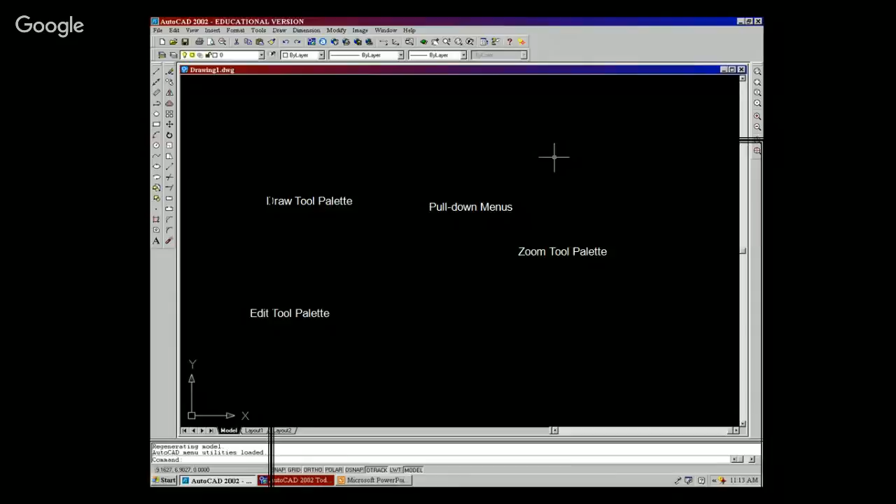Now let us see what these things are. This is the command area, at the bottom of the screen, where it is written 'command'. Here you will give the input. For example, if you want to draw a line, you will give a line command: type the first alphabet, L, and press enter. Something will happen on this black screen, which we will demonstrate when we show you. First, let me explain what things are available now.

This is the standard toolbar, in which you have the basic operations: file opening, closing, saving, printing, zooming in, zooming out, cut, copy, paste, undo, etc. Above this is file, edit, view - this is called the menu. These are the pull-down menus, just like in Word, where there is a file menu with various options in it.

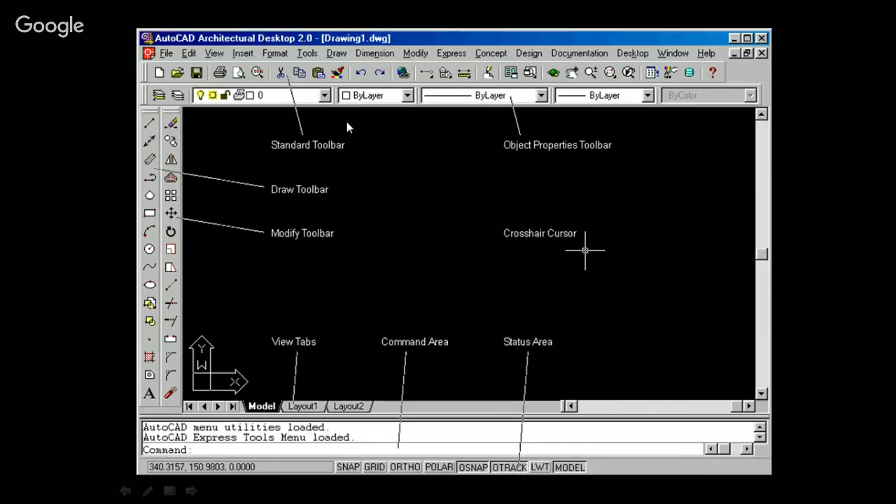From the menu you can also give commands like draw, modify, or you can give the command from your icon bars - these are the various icons, the shortcuts. When you get familiar with the software, you can directly use these icons. So these are the various options.

How to start AutoCAD? Double click on the AutoCAD icon which is on your screen or desktop. What you get in the AutoCAD environment is drop down menus, standard toolbars, specific toolbars, the graphic area, the view tabs, the command area, and the status area. The command entry can be done through commands, menus, and icons.

First, for making any drawing, you have to set the units, or do the formatting - in which units you will be working, whether it is millimeters, centimeters, or inches. So you will set the decimal units and the precision. For that you give a command known as format units.

Next we come to the limits. We will give limits to our drawing. Generally it is 12 by 9, and it starts from your lower left corner, that is 0,0, and upper right corner - for example, it is written here 200 by 220 centimeters.

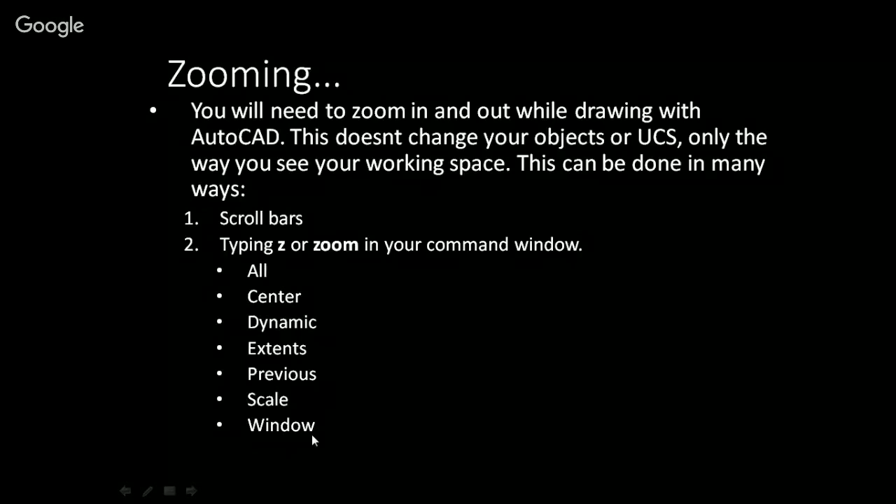Then there is zooming. These are the various options - all, center, dynamic, extents, previous, scale, and window - which are available under the zooming line.

And if you want to draw a line, how do we proceed? First of all, we have to give the line command or type L. Then we will give the value of X1, Y1, Z1 is written here, but if you are working in 2D, there is no need. Then for the other point, it is X2, Y2.

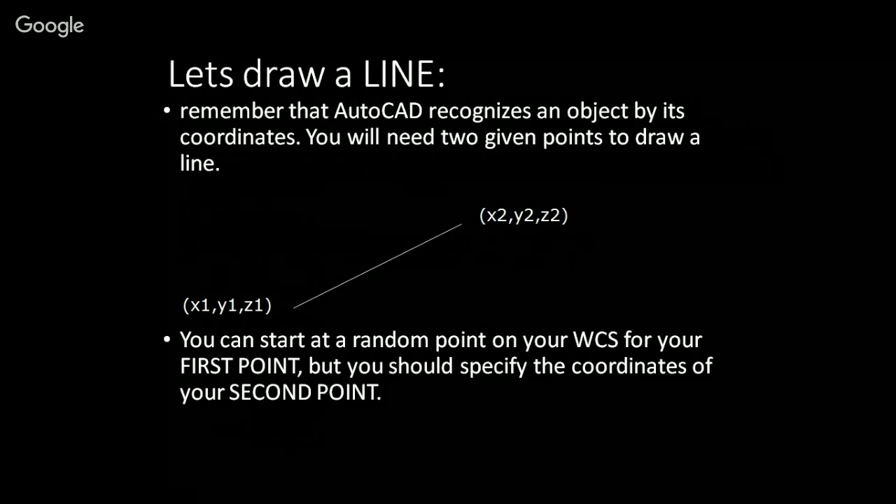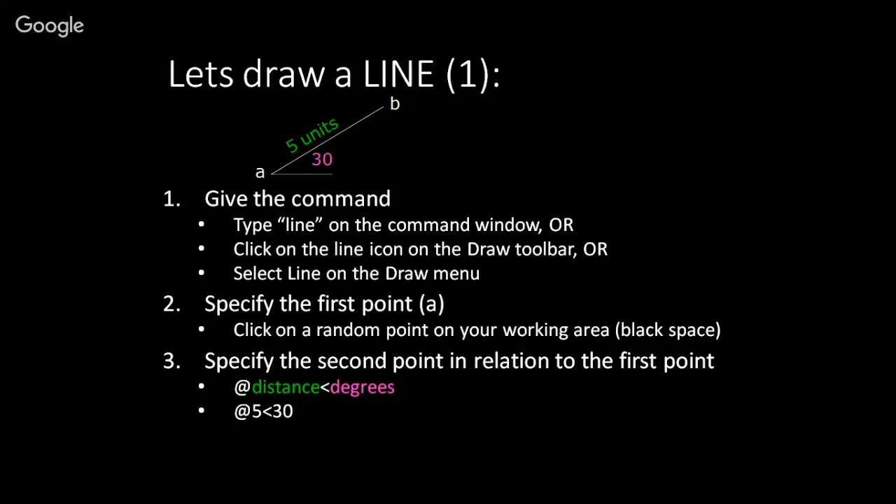So now let us start with our drawing. Let us say a line is to be drawn of 5 units at an angle of 30 degrees. So let us draw it by various methods: relative coordinates, absolute coordinates, in Cartesian mode as well as polar mode. And what are the ways? Now Mr. Hridaypal will demonstrate you how to do it.

Exercise. Yeah, exercise.

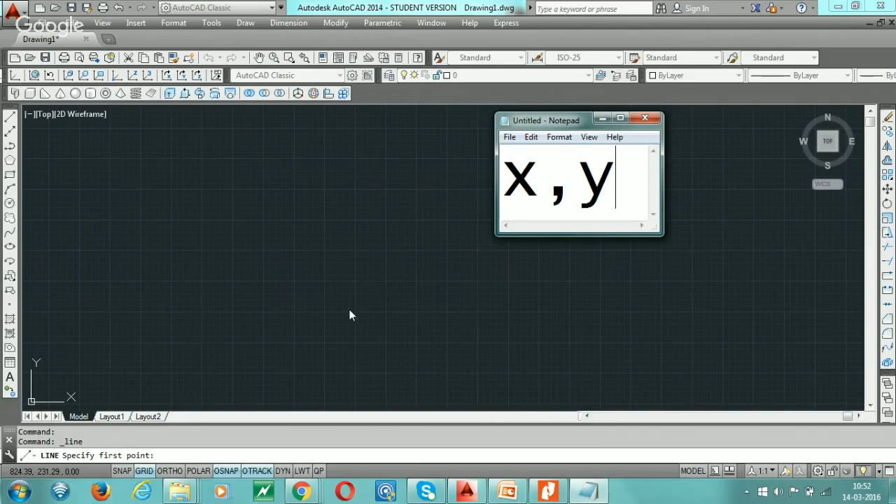Now go to the line command from the draw box. First, the syntax in this is the syntax of the line command. Syntax is the way to write, like first x comma y in 2D. We are using absolute coordinate system, so our first point is 0.

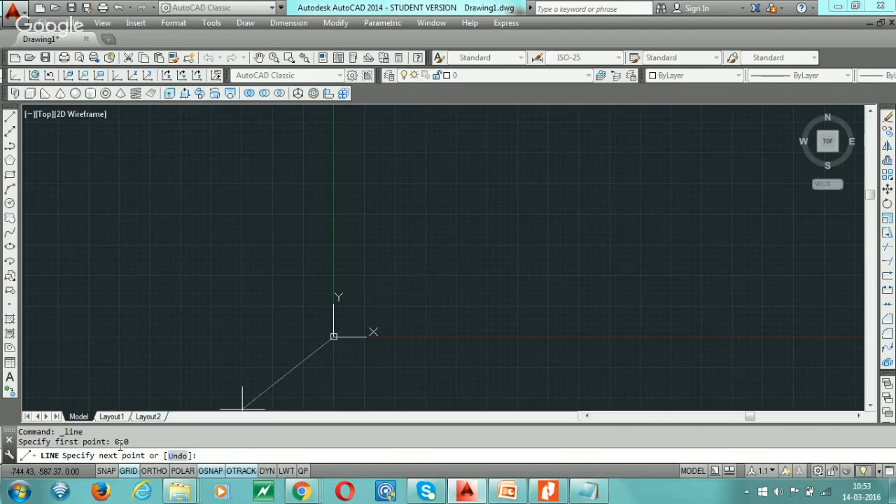First point is - this is the origin point. The first point I take is 0, 0. Now the second is 5. We are making in x direction 5, 5.

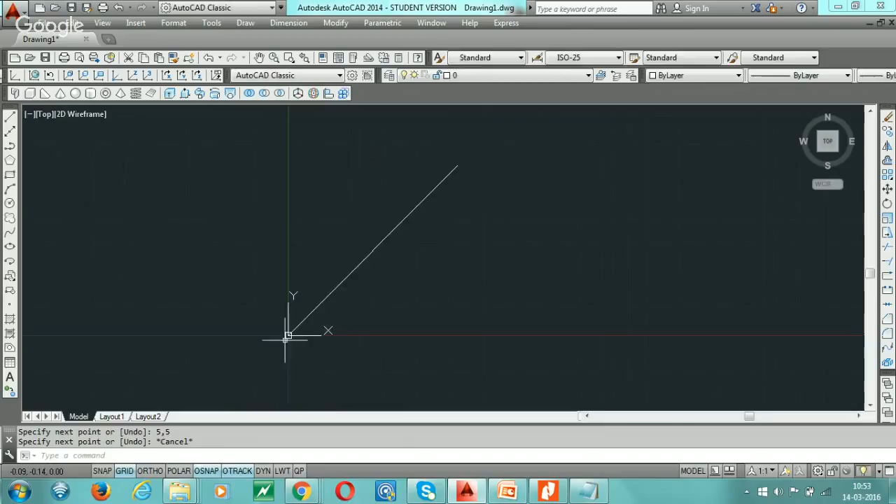Now with the help of scroll, zoom, we draw this line with the help of absolute coordinate system. In absolute coordinate system, the origin point is fixed. In a relative coordinate system, the origin point can vary.

I am making this diagram with the help of the line command. This A point is at 2, 2 in x and y. So for the first A point...

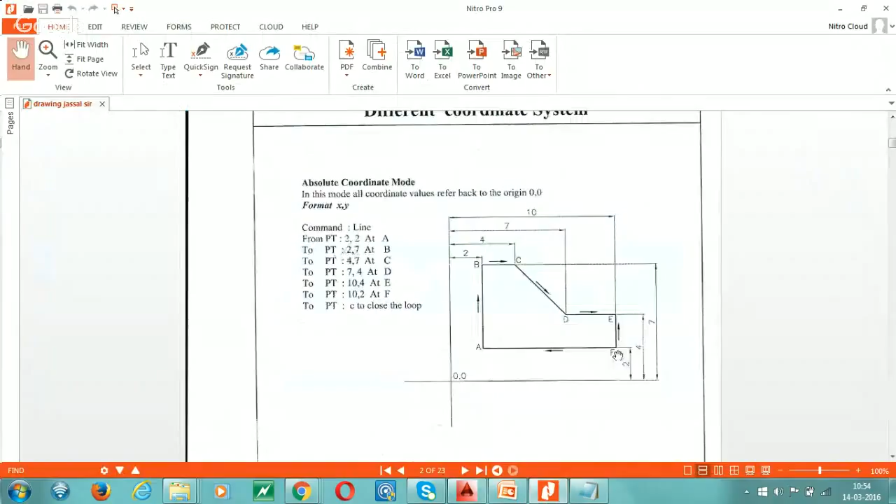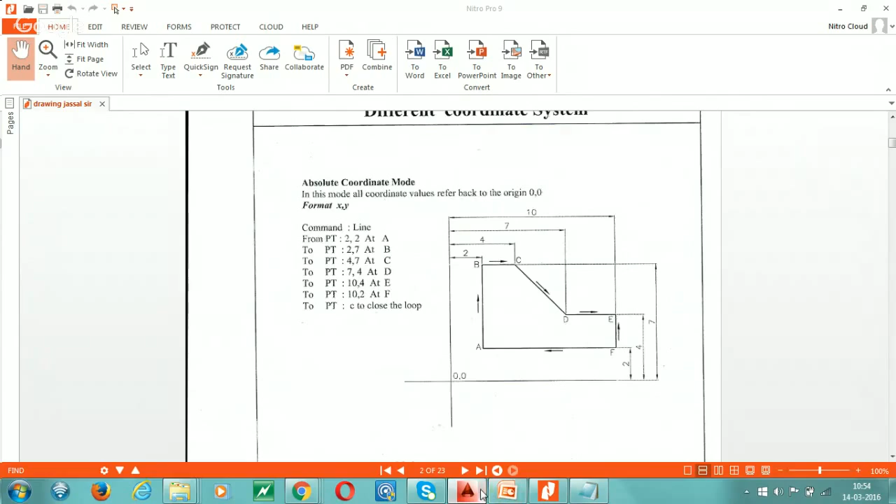Again L enter. The first point is 2, 2. Then go to the second point here, 2, 7. This point B is 2, 7. In y direction we are going to 7, and in x direction we are going to 2.

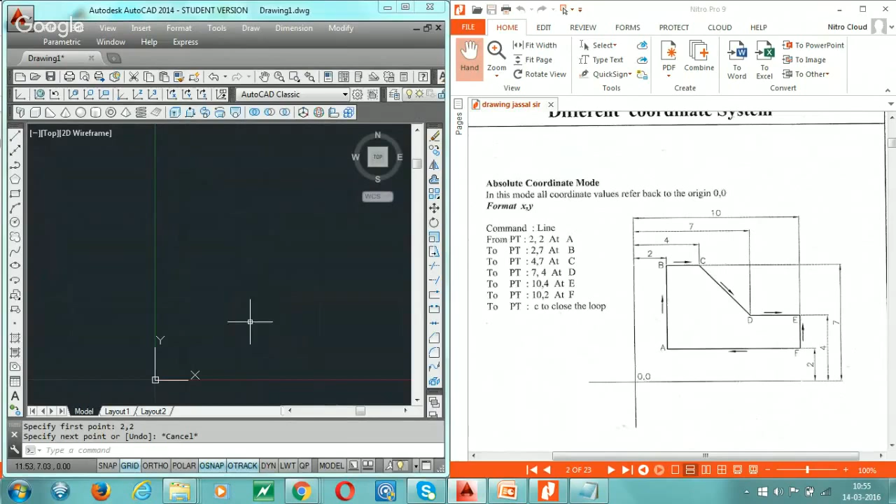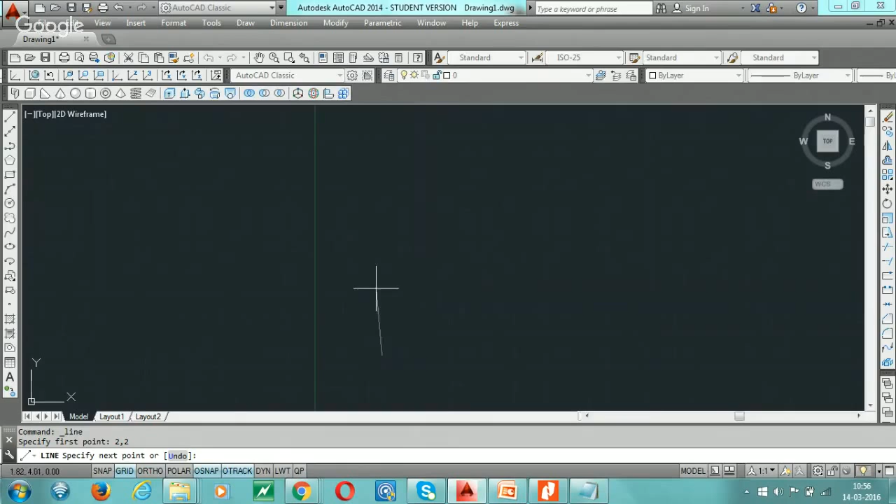I repeat this exercise again. The first point is A, the distance is 2 in x, 2 in y. Because we are using absolute coordinate system, so first we take a line command from the draw toolbar. The first point is 2, 2, and the second point is 2, 7.

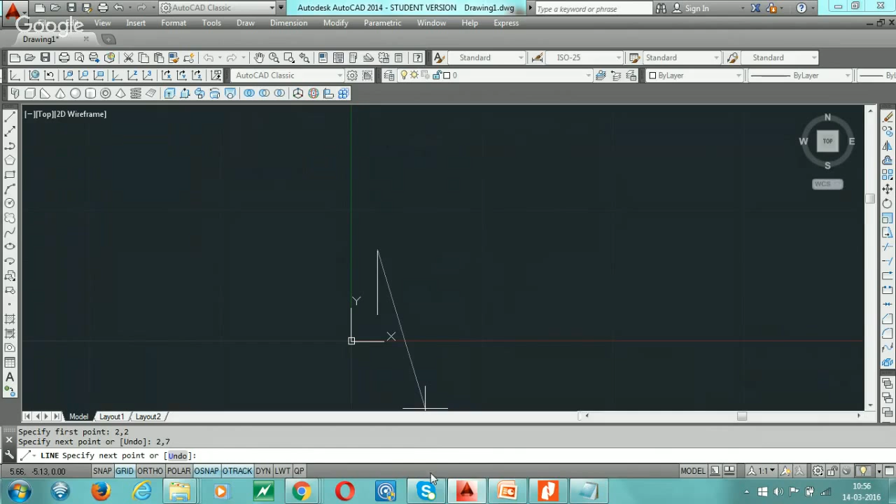Now the third point C is in y direction same at 7, and in x direction we go 2 further. So from absolute coordinates its distance is 4, and in y direction its distance is 7.

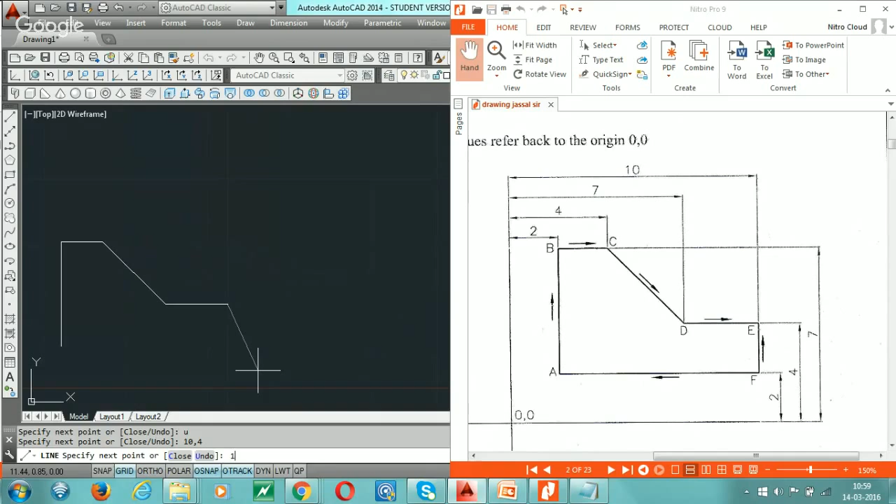After that we can use the close command to close this diagram. C, enter and enter.

Now this was our first exercise with the help of the absolute coordinate system. In absolute coordinate system our origin is fixed. Next we do this exercise with the help of relative Cartesian coordinate system.

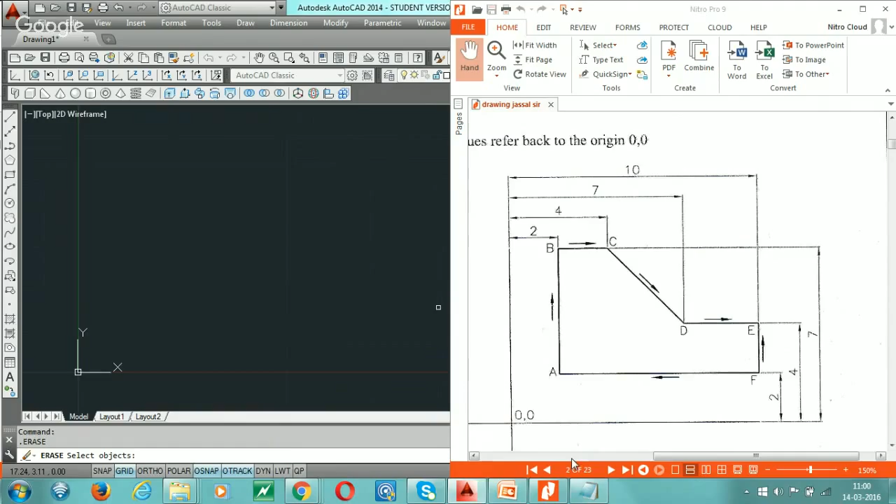We select all and delete. We take the first point with the help of absolute coordinate system, and other points with the help of relative coordinate system.

In a relative Cartesian coordinate system, our syntax is @x comma y. The @ symbol is used for the relative coordinate system. It's a symbol for relative coordinates.

So first point we take with the help of absolute coordinates. Take L, enter. Sorry, the first point is 2 comma 2.

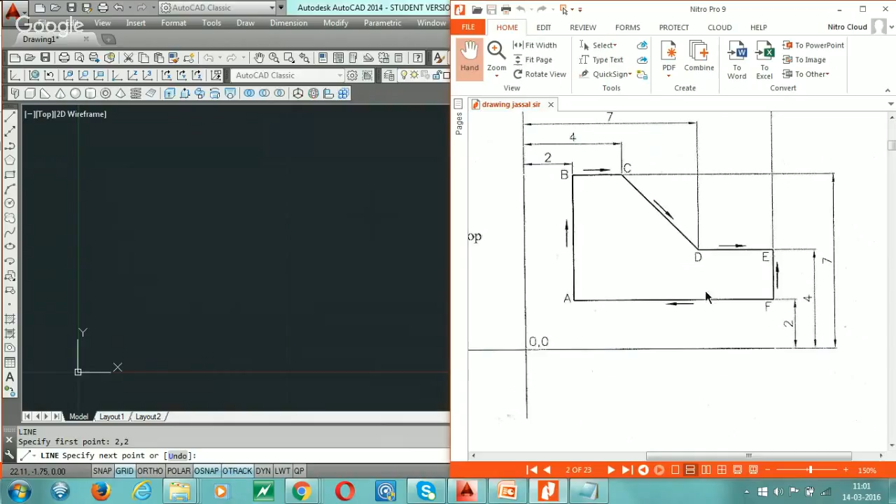After that the second point B: from A, the distance of B in Y is 5. Then we use @. In X we are 0, we are not going further in X. Then X is 0. So 0, @0 comma 5. Enter.

Now for C point, our Y is going to be 0 and X is 2. Then again use @. Here X is 2 comma 0. Enter.

For D point we are going to be negative because our origin is at C point. If we use @ for D point, the distance for D point from C is downward, 7 minus 4 is 3, in negative y, and same in x direction.

Now use @. In x we are going to be positive, in y we are going to be negative. 3 comma minus 3, enter.

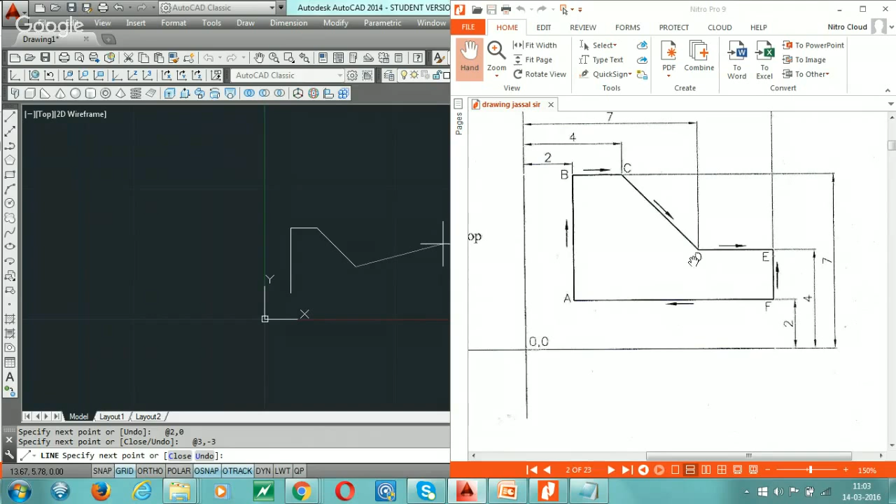After that we go to the E point. For E point we go 3 in x direction, 0 in y direction. So at the rate 3 comma 0, enter.

After that, for downward, in x we go 0 and in y we go 2. Then use @. Here the direction of y is negative, minus 2. This is wrong because in x we have 0 - the minus 2 is the y direction. So our syntax is x comma y. Then 0 comma minus 2.

From here we use the relative system, or otherwise use the close command. In the last diagram I used C for close, or click here. This is going to close here because we start here again. Then again L, enter.

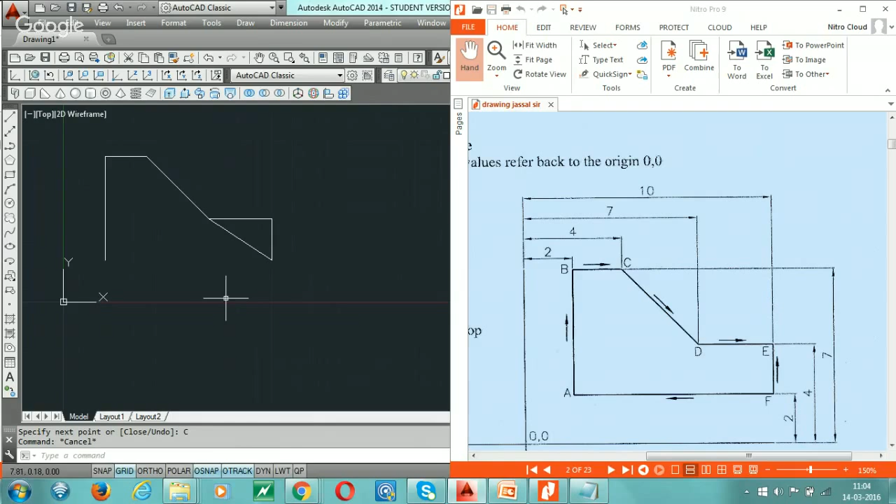Now we go to the Osnap command to pick this point. This point is shown as an end point. This end point will be shown with the help of the O snap function key.

We turn on Osnap with the help of F3 or direct click on Osnap. First we set the settings according to our requirements. Right click on Osnap and use directly which point we need. Here we need to select the end point.

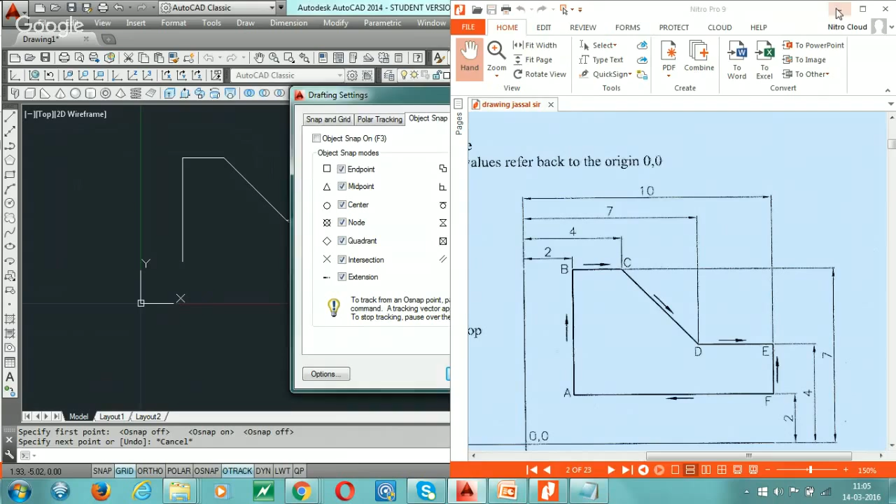So go to Osnap, go to settings, clear all - we only need end points. Then select end point and OK. Again turn on Osnap with the help of F3 or click on Osnap.

Then take line command, L, enter. Take this endpoint and this endpoint. Select this and delete.

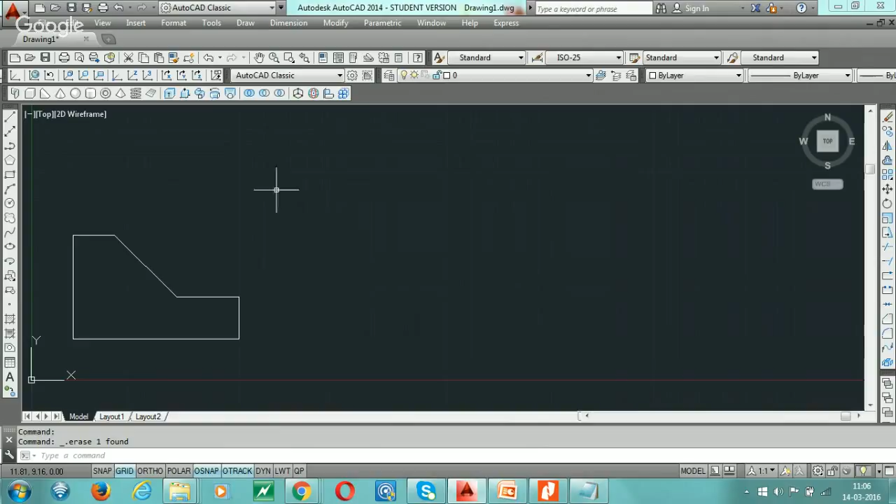Now we made this diagram with the help of absolute coordinate system and relative coordinate system. Now let's talk about the polar coordinate system.

Mostly we use a relative coordinate system in AutoCAD. In relative, polar is mostly used. Everywhere we use relative polar.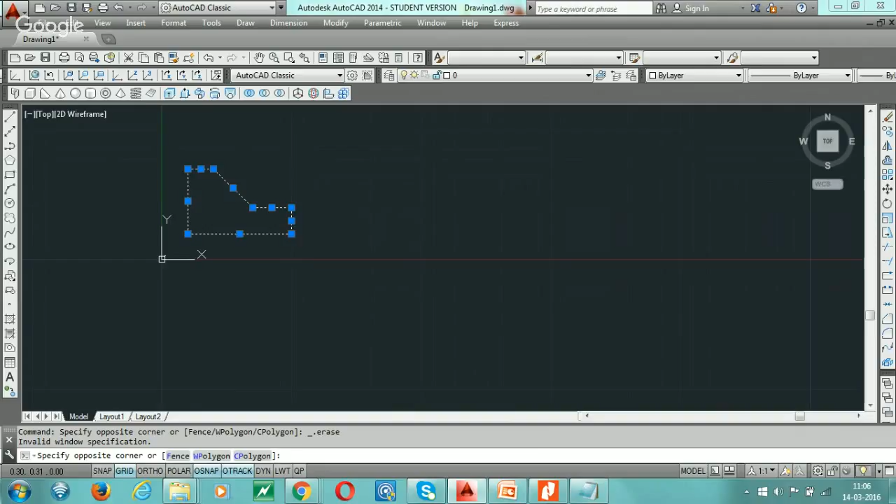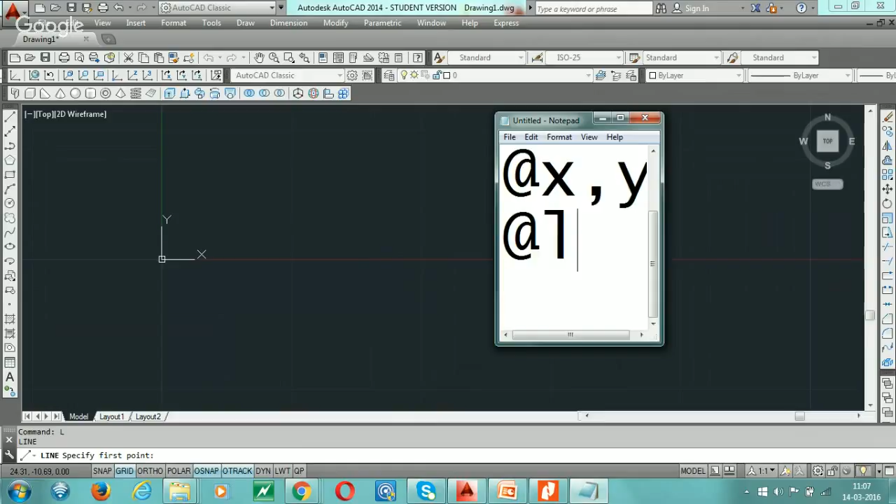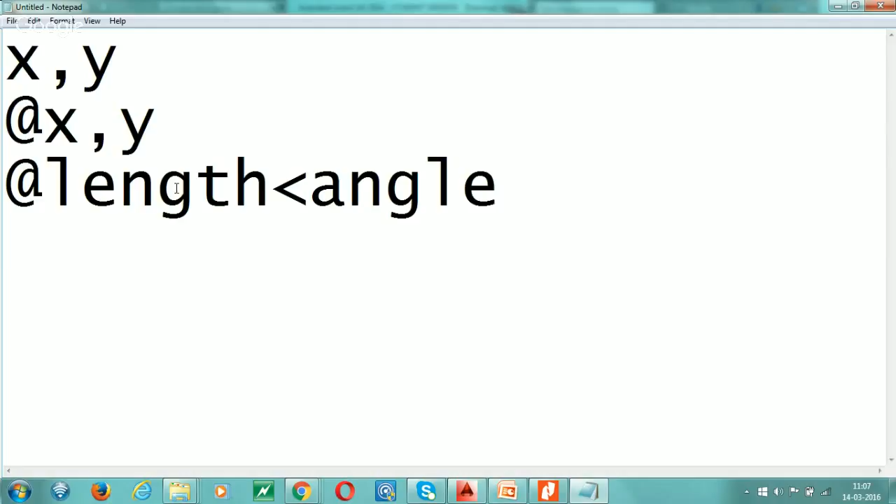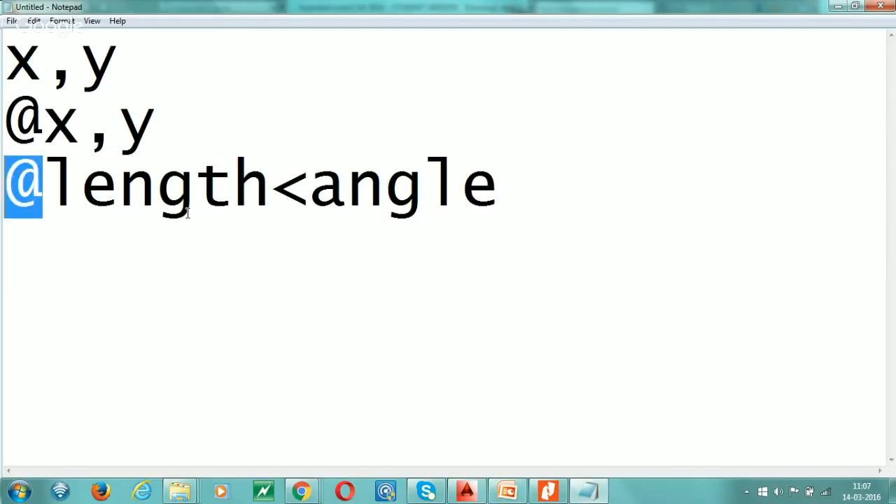Take the line command. The syntax of relative polar is @ length less than sign angle. This is the syntax of relative polar. For polar only - absolute polar we are not using @, but maximally we use relative polar.

Now I give you an example of relative polar.

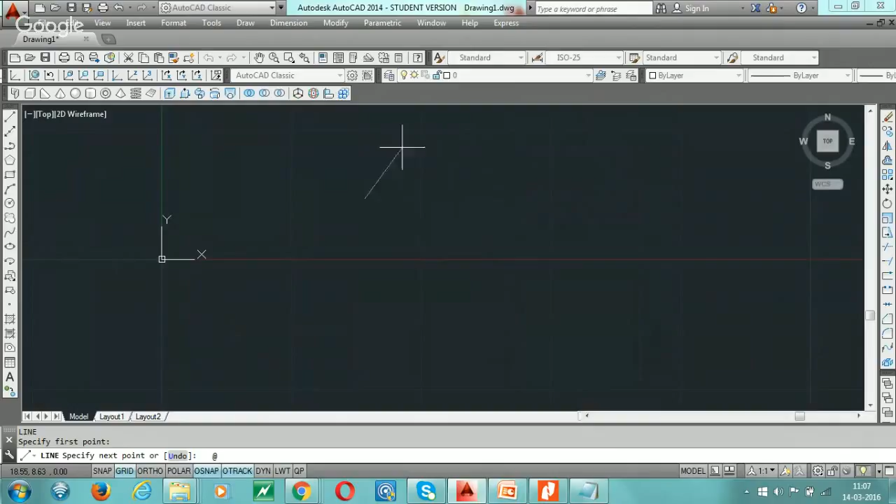First take a point anywhere. After that we use shift at the rate. Our length is 5. The angle is 30. Shift and 30, enter.

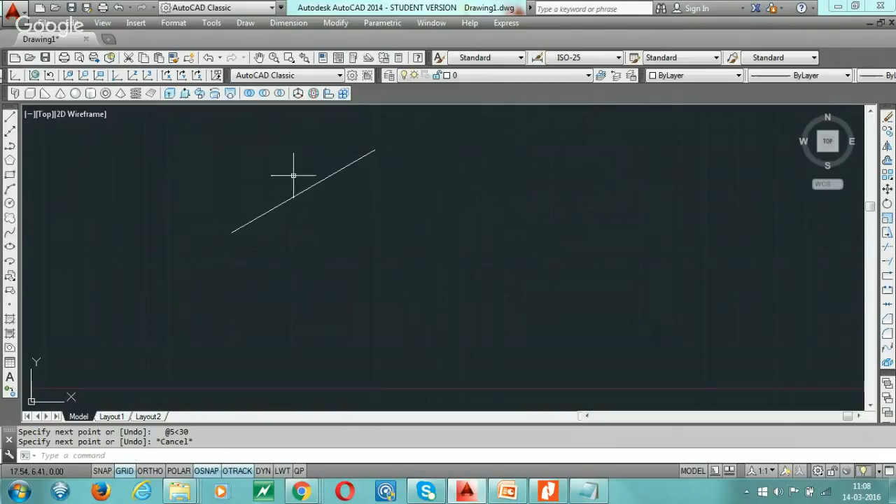From this point, in anti-clockwise direction our angle is 30. Here we go to the format command and use clockwise direction. Go to the units, click here for clockwise.

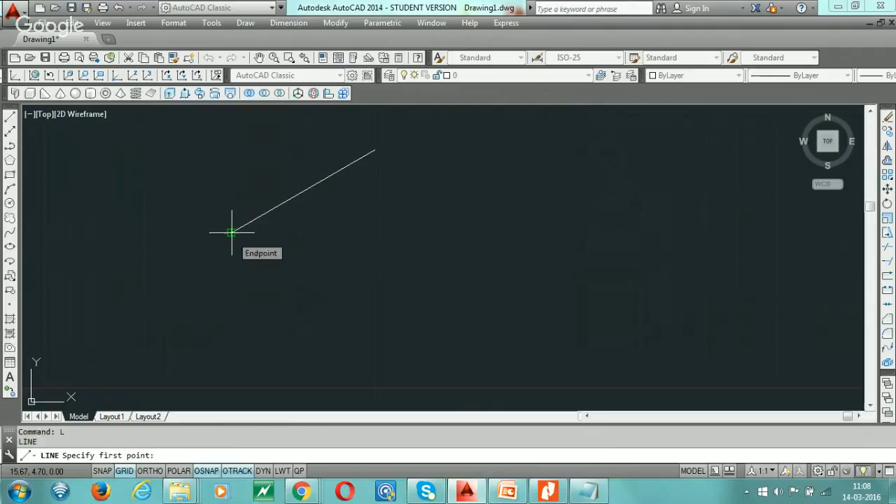Again the L command. With the help of OSNAP we choose the endpoint. Use the same command like shift at the rate. Length is 5, less than sign, the angle is 30.

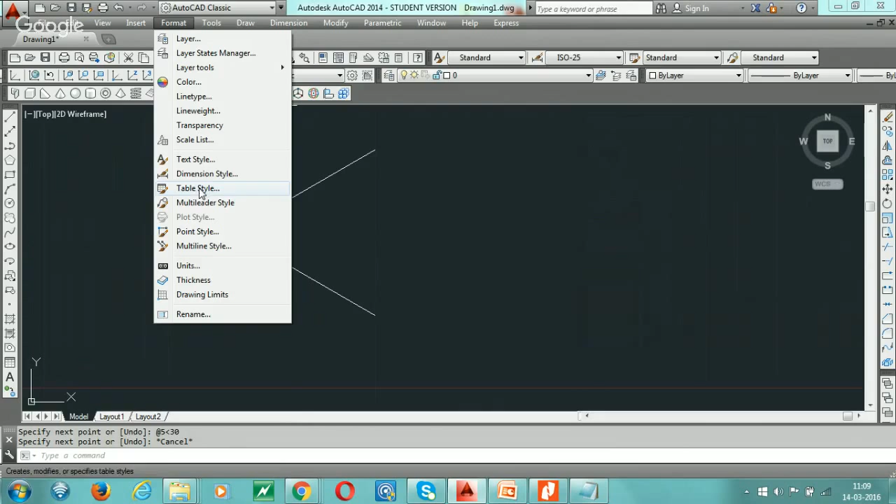This is a difference in units. If we use clockwise direction, positive we can; if we want anti-clockwise, we can. Go to format, go to unit command, and again set anti-clockwise. This is our polar coordinate system.

In OSNAP we use other settings like midpoint, center, nodes, quadrants, intersection, extension, perpendicular, tangent, nearest, apparent intersection, parallel. With the help of these we select whichever we require. Then okay.

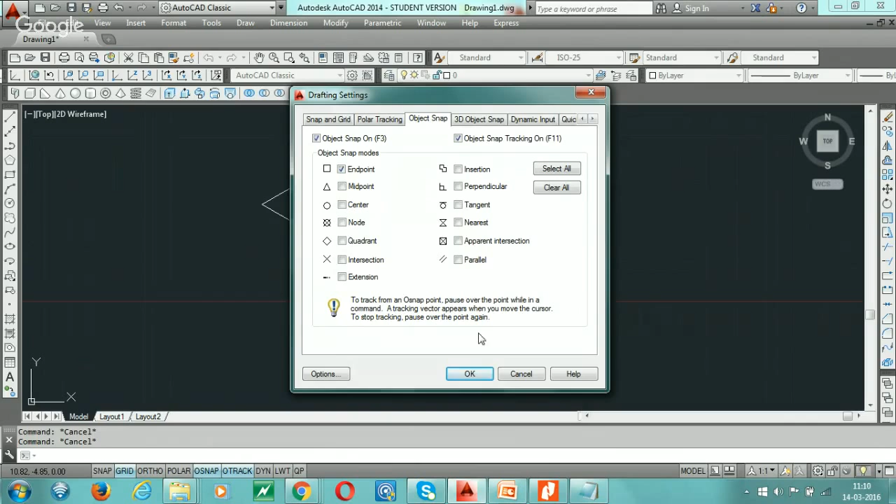So what you have learned is how to draw a line by two methods, our coordinate systems which are absolute and relative coordinate method, and in Cartesian and polar method, right? So before we proceed further, I would like to get feedback from you on whether it was clear to you at all the centers.